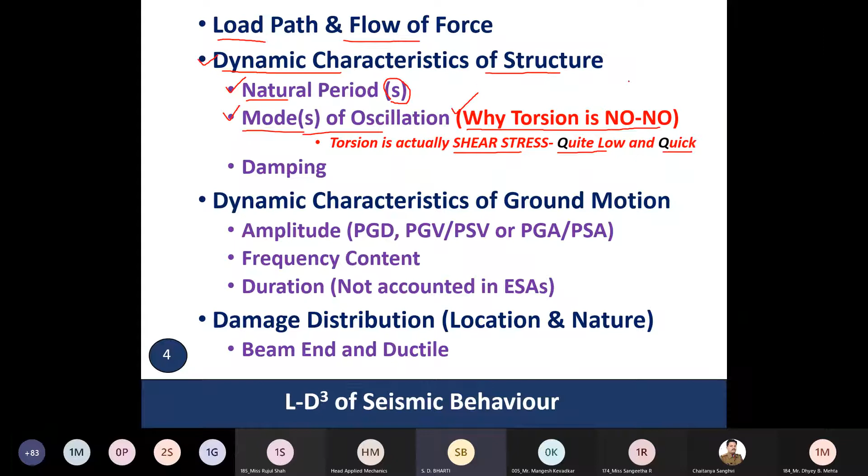The third dynamic characteristic is damping. We typically assume 5% in Indian standard and other standards. This is the material property. Previously, in the earlier standard, there used to be 2% and 5% - 2% for steel and 5% for concrete. Now we have 5% for both. So these are the dynamic characteristics - this is the D of LD.

Another D you can see is LD3 here - the dynamic characteristic of ground motion, which is represented by three parameters: amplitude, which can be peak ground displacement, peak ground velocity or pseudo velocity, peak ground acceleration or pseudo acceleration; the next one is frequency content; and the third one is duration.

Here I want to underline the duration effect - the analysis process that we are doing using the static methods is not accounting for the duration effect.

The next D of LD is damage distribution. As you have been listening from other speakers, under the design earthquake, a building is bound to undergo in the inelastic range - it cannot remain in the elastic range under the design load. So there is bound to be some damage. Damage, inelasticity, non-linearity - these three words are interchangeably used, but you have to understand: damage is the manifestation of inelasticity, and non-linearity is the cause-effect relationship of force deformation when a building gets into the inelastic range. So non-linear behavior, non-linear analysis, inelastic behavior, and damage - these are three terms interchangeably used, but the focus of each is different.

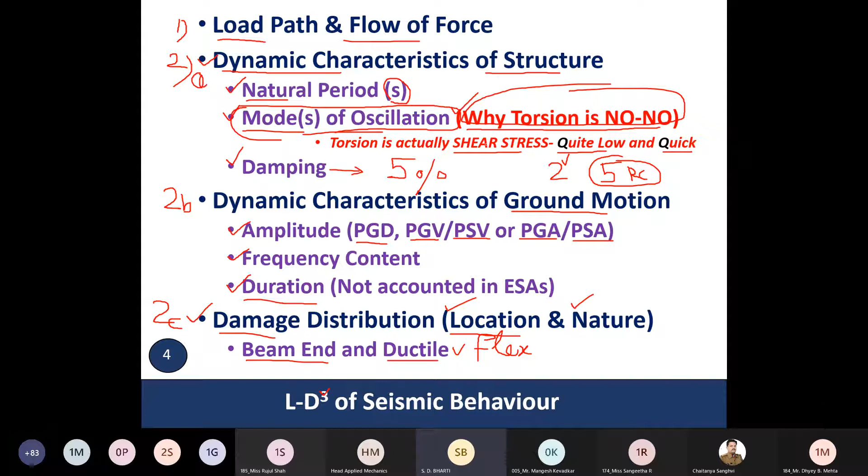Next, in the previous slide we saw modes of oscillation is the biggest problem for us. If you are able to control the modes of oscillation and make sure that torsion and other quick or brittle modes are avoided, then half of your job is done. Now let's understand how modes of oscillation are controlled.

The biggest, simplest, and most dominant thing to control modes of oscillation is configuration. IS 1893 describes configuration by way of saying this is not, this is not, this is not - meaning if this is, then it's irregularity. So configuration is actually defined negatively by way of defining irregularity. Irregularities are essentially of two kinds: plan irregularity and elevation irregularity. Plan irregularity can be a re-entrant corner or a non-parallel lateral system - please understand this is in plan, and this is an elevation.

So if you have a non-parallel system, there are things in both plan and elevation that are quite similar. Re-entrant corner in plan and re-entrant corner in the vertical also.

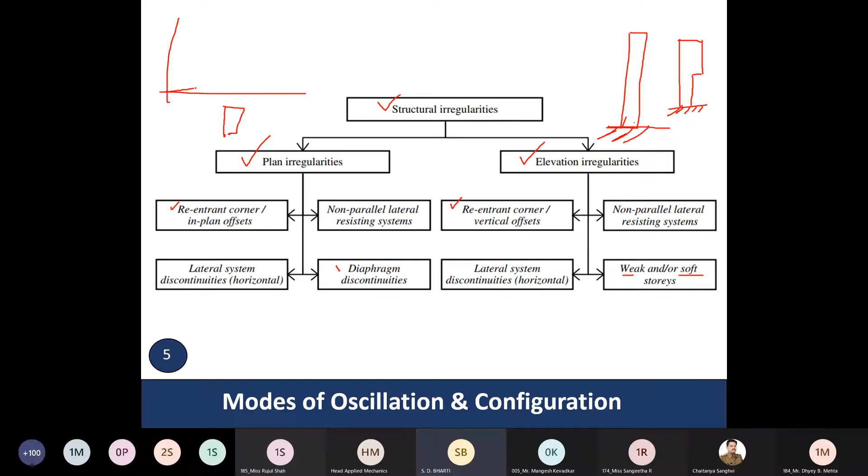Weak means it doesn't have the sufficient strength. Soft means it doesn't have the sufficient stiffness. Let's understand. See, this is your soft. And this is your weak. Both of them having same strength practically.

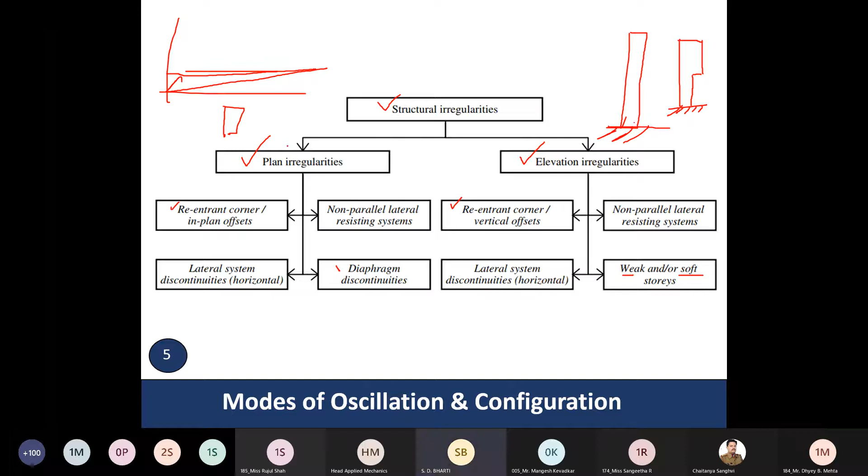Let's understand attributes of a good configuration - what your configuration should have in order to have desirable modes of oscillation. It should have low width to depth ratio, so there is no torsional effect. It should have low height to base ratio - we call them slenderness ratio and aspect ratio. So there is no overturning moment.

Similar story heights - dissimilar story heights will create stiffness irregularity if you are to use 1893 language. Short span, low unit stress, and symmetrical plan again will have a good deformation behavior. Uniform, again it's a stiffness issue. So these are the things, they have been worded differently.

If you missed one, what is the consequence of redundancy? Means alternate load path. In earthquake, since we are allowing damage, you always want redundancy. Please understand, redundancy may be a problem for your analysis. But for structure under earthquake, redundancy means if one member yields or gives way or gets into plastic deformation, there is an alternate load path.

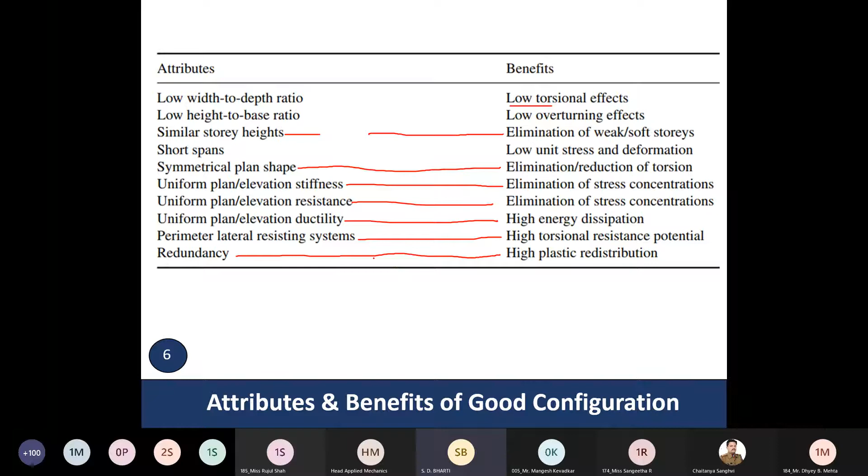So see, earthquake design is about matching capacity with demand. This is terminology which most undergraduate classes don't learn. But in graduate classes and doctoral programs, or in the typical literature of earthquake engineering, you will find capacity and demand. Originally these are terms which have actually come from economics and management. But civil engineering or structural engineering, particularly in the West, is quite influenced by economics. So that is why these terms are used.

So let's understand what are the demands and capacity in terms of earthquake engineering, and these are the two things where the word demand is used. Loading imposed is also known as the action part, which is also called earthquake demand, which leads to force loading as well as displacement. Please understand, I am not saying that in the linear elastic range, force and displacement are not okay.

But in earthquake analysis case, it's a displacement loading which is critical, which is the load actually. What you are doing in earthquake is that you are shaking the ground, you are trying to displace the ground. And because you are trying to displace the ground, there is a mass sitting on top of it. The mass will experience inertia force, inertia effect, and then inertia effect will generate inertia forces which will be getting transferred from top to bottom. So that is why - what is causing it is displacement.

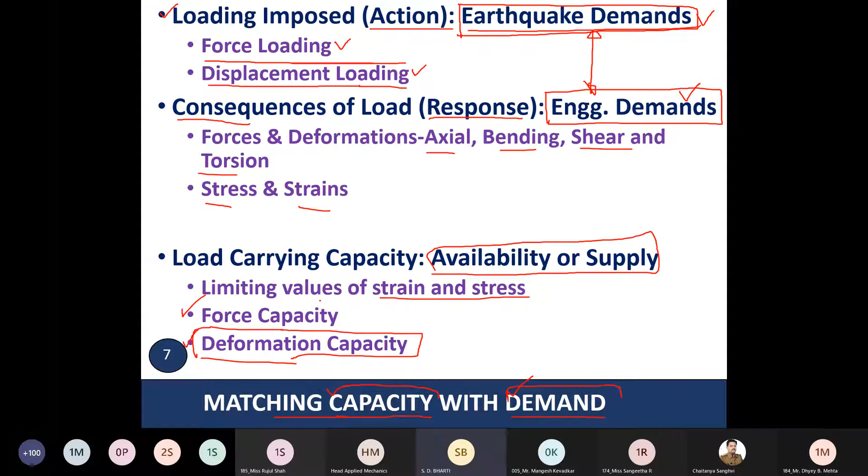Let's move on, this is a very good chart. We are talking about seismic demand, design philosophy, performance objective, and the limiting engineering parameter. The first one is the seismic demand or hazard level. The earthquake has to be defined in terms of its probability of happening. We are assuming Poisson's distribution, and design life is 50 years, which is generally the design life for most buildings or regular structures.

So if you have a service level earthquake, which is a minor earthquake that happens frequently, it will have 50% probability of happening in 50 years of design life. Using Poisson's distribution, this gives a return period of 72 years.

What is the design philosophy for the service level earthquake? You want no structural damage, or some say minor non-structural damage. Nowadays the design objective is defined both in terms of structural damage and non-structural damage, so you can say no structural damage, or no non-structural damage also.

And what is the performance objective? Performance-based design or performance evaluation has become a buzzword now. You will learn more about that when Professor Murthy talks tomorrow. What you want is continued operation or immediate occupancy. These two terms are used interchangeably. Continued operation means you don't have to leave your building premises and you continue to operate. Immediate occupancy is slightly more, because it just begins to touch the yield.

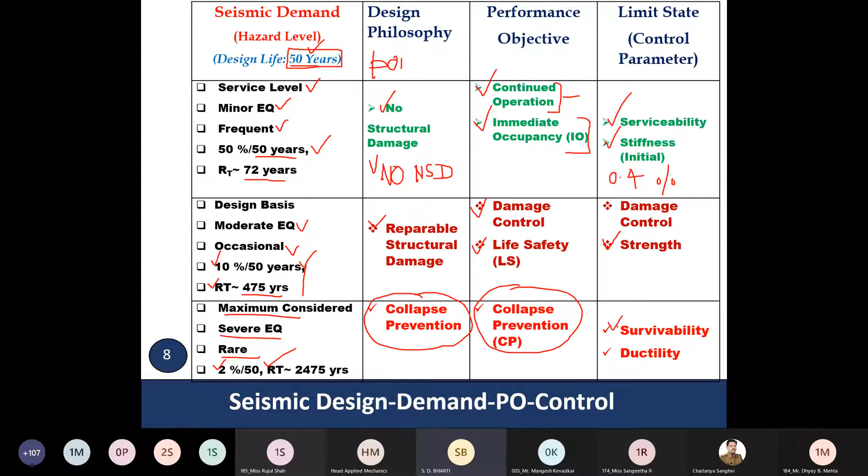These performance objectives, we have been doing. Now the new term is collapse prevention performance objective. Your limit state is survivability and ductility. These are the things which will help you there.

So the next thing is that, just a minute. Yeah, there is something. Just remove this, this is not there. This is from the next slide.

So now what are the methods of investigating seismic behavior? If your interest is only up to elastic behavior, you don't want to get into the inelastic range - this is our code as of now, which tells you to investigate up to elastic behavior, follow certain prescriptions, and assume that in case of a severe earthquake, your structure will follow a well-defined ductile deformation path. But your actual investigation is limited to only the linear elastic limit.

So there are two methods: linear static methods, where the input is taken from design spectra or response spectra, or any kind of spectra - there are a variety of spectra - and both methods are actually static methods. The equivalent static method, or equivalent static single mode method, our code calls it ESM. The other one is also equivalent static, but uses multi-mode, which is called the response spectrum method. The code calls it RSM.

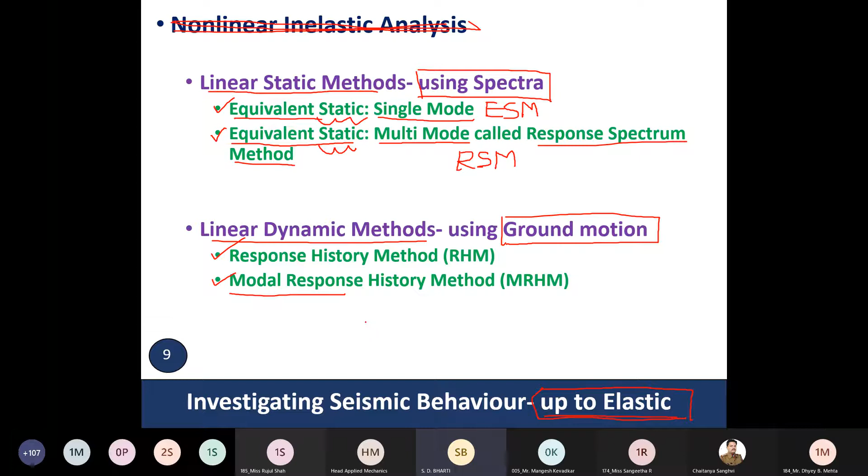The input required for this is the ground motion history. There are two ways of doing it: one is the response history method, the other is the modal response history method. Please understand modal response history or modal response spectrum method, both are kinds of superposition. One is in the frequency domain, where each mode is calculated separately and then put together. The first one is the time stepping integration scheme.

Next we move on to the nonlinear method. In the nonlinear method, there are also two methods. All nonlinear methods are basically based on pushover. Pushover methods essentially depend on two things. One is the distribution of the lateral load or lateral push.

Your objective in applying lateral load is that you want to imitate the inertia effect. You may have a lateral load which is distributed like this, or you may have a lateral load which is uniformly distributed, depending upon how your superstructure is behaving.

Depending upon that, the nonlinear static method, or what is popularly known as pushover based methods, are of two kinds: conventional pushover and adaptive pushover. In conventional pushover based methods, once you decide the pattern of push based on initial stiffness, initial mass, or initial damping on the fundamental mode, you fix the push pattern and continue with that till the time your desired point or point of interest is reached.

In adaptive pushover, every push you update the K and M, and once the K is changed, you keep changing the push pattern. So this is how nonlinear static methods are of two kinds: conventional push and adaptive push. In adaptive push, you keep on updating your model, meaning the computer keeps updating the model.

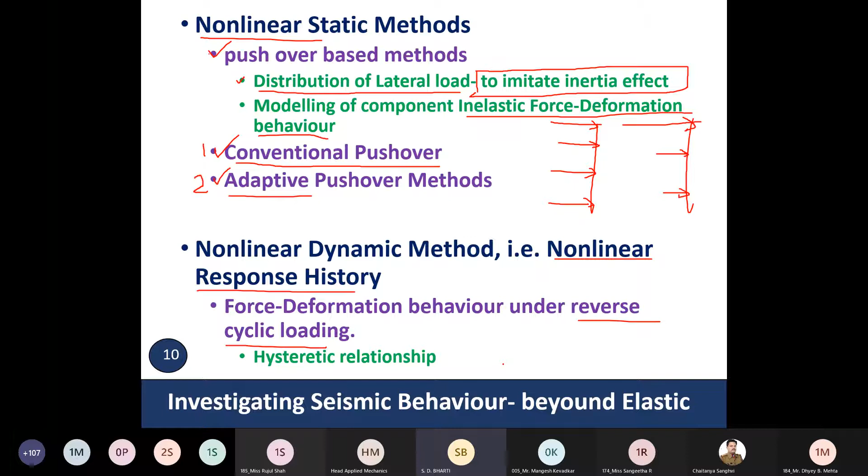The second one is the nonlinear dynamic method, also known as nonlinear response history method. In this also you require force deformation behavior under reverse cyclic loading. You require the complete hysteretic behavior or cyclic behavior of the component. So these are the methods of analysis.

So these are some of the component force deformation behaviors. We always love this one because it dissipates maximum energy. It goes like this, and when it comes back, it takes full shape with no deterioration. Whereas in this case, once it comes back, during the returning phase, there is a degradation in the stiffness.

Every successive cycle, the first one is the outer one, and every successive cycle it comes back in. So in every successive cycle, the energy dissipated is reduced and the stiffness is declining. Pinched behavior is typically when you have some slip or some kind of mechanism where every time there is a slip.

So this is the pinch hysteresis loop. There is cyclic degradation - every cycle there is a degradation in stiffness and strength. These are some of the idealized typical hysteretic behaviors that you would need to plug in when you do your actual nonlinear response history analysis, or full dynamic analysis under nonlinear conditions.

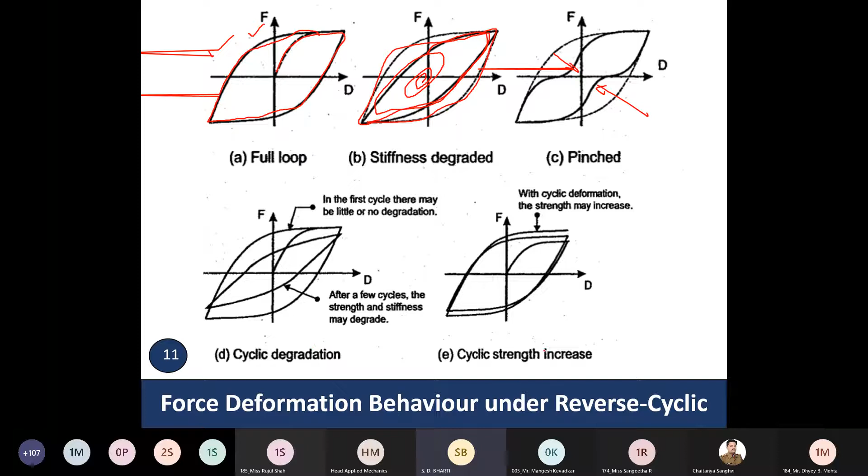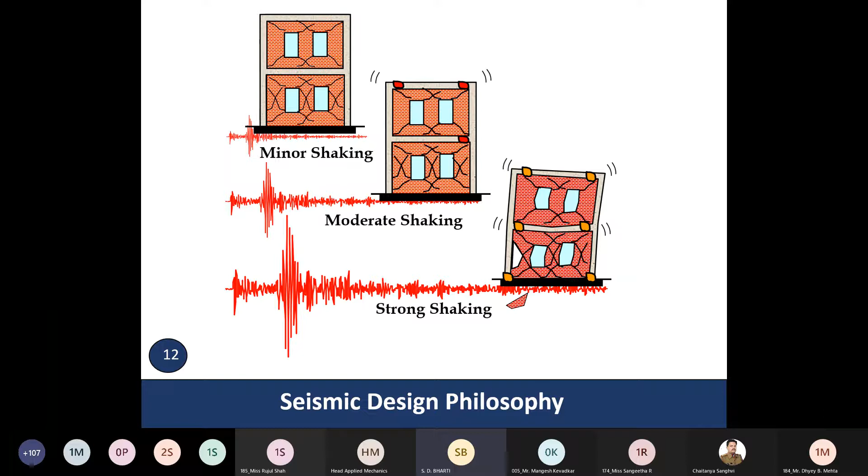This is the philosophy as we had discussed in the table. In minor shaking, there should be only minor non-structural damage, but no structural damage. In moderate shaking, you have some damage in the structure, and in strong shaking, you have significant structural damage, but no collapse. This is the design philosophy we have been familiar with.

These are the seven attributes. The first one is configuration. If your configuration is good, there is no stiffness and mass irregularity, both in plan and elevation. Your structure's modes of oscillation will be perfect, there will be no stress concentration. Even though there is damage, the damage will be well distributed and there will be no quick, brittle, or sudden collapse or failure.

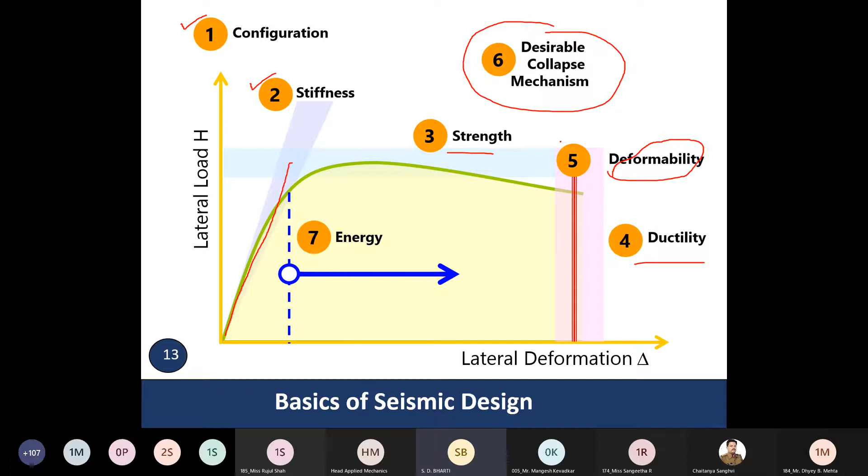The second attribute is stiffness, which governs serviceability. Initial stiffness should be good enough so that under minor shaking conditions, the non-structural elements are secured. The third is strength. The fourth is displacement ductility or system ductility. Fifth is the total deformation capacity as a system so that energy dissipation is maximum, and all this helps you choose a desirable collapse mechanism. You are all familiar with these seven attributes of seismic design.

Based on these, there are four methods of seismic design. One is stiffness based, another is strength based. These two are currently in use. Deformation based design is also in practice, and as you know, it essentially relies on nonlinear analysis. Our energy based design is still in the developmental stage, which will combine both force and deformation together in the nonlinear range. This is very difficult because what you require in energy based design is the nonlinear component force-deformation behavior.

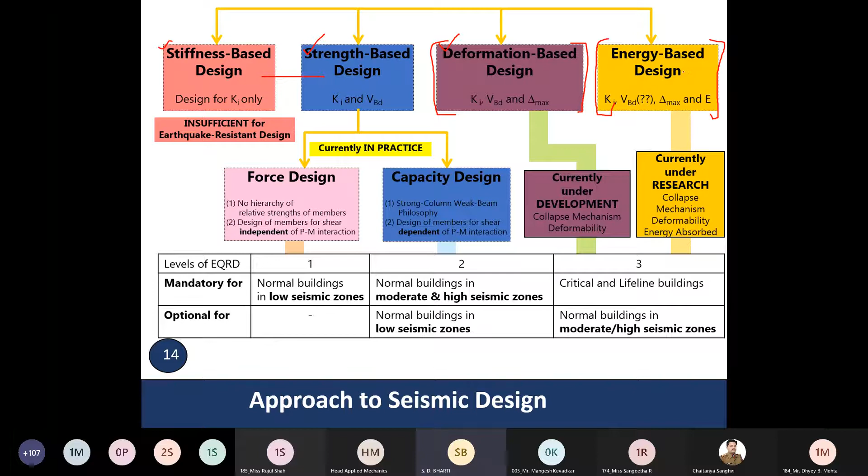Okay, so with that, the background part is over. Now let's move on to supplemental energy dissipation devices.

What do supplemental energy dissipation devices do? Just wait a minute. What you can see in the background is the newly set up National Earthquake Test Facility at MNIT Jaipur. We'll talk about that in subsequent slides if time permits.

Why do you want a supplemental energy dissipation device? The basic purpose is performance enhancement. How do you enhance performance? As you have seen, the structure undergoes damage. Why does it undergo damage? Because the earthquake pumps in energy, and that energy has to be dissipated without much damage. So if you can create a mechanism by which energy can be dissipated by some desirable structural component or element that can dissipate energy without endangering your main structural system, that is performance enhancement - no structural damage, no non-structural damage.

So the purpose of a supplemental energy dissipation device is energy dissipation, which is actually called damping. Literally, damping means lowering of the response amplitude. But why does that happen? It happens because energy is being sucked in. And when you install an energy dissipation device, it will also increase stiffness and strength, or it may typically.

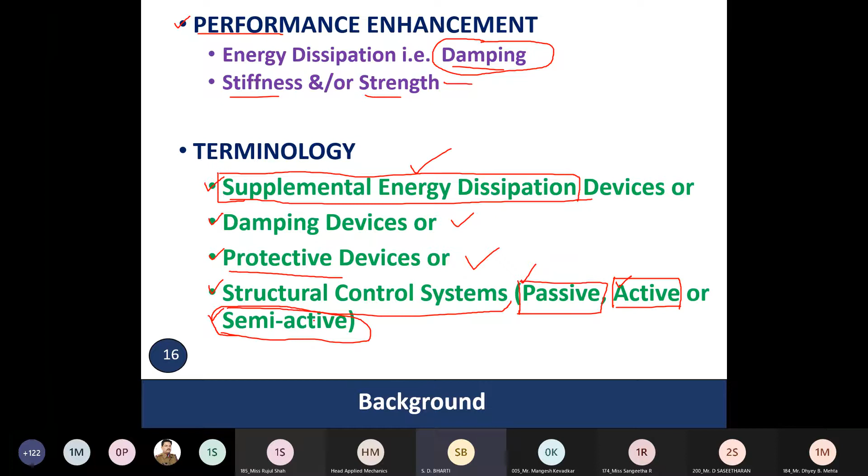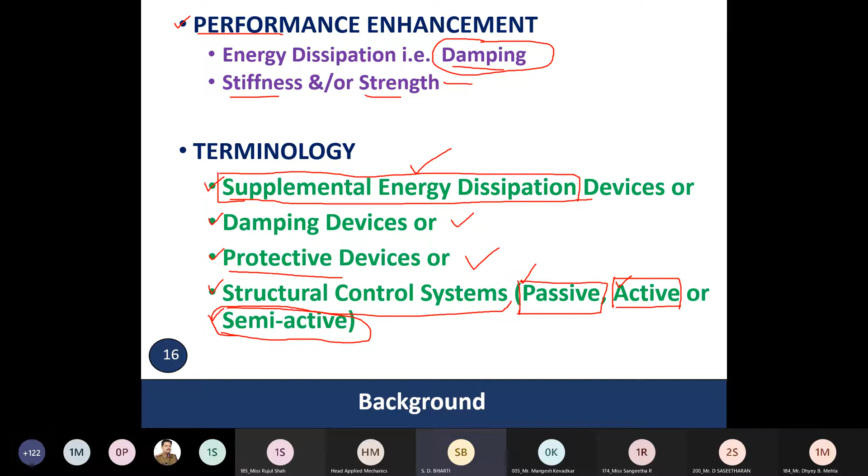Passive and semi-active are more common. Semi-active is an extension of passive. In a passive device there is stiffness, there is damping, and there are all the arrangements. So if by some way you can change the damping or stiffness of a passive device, it becomes semi-active - some people call it controllable passive also. So this is the terminology of supplemental energy dissipation. This is all about it.

Supplementary energy dissipation devices are essentially of two kinds. Let's understand supplemental energy dissipation devices - I'll be using this term consistently, not damping device, not control system, not protective system, because this term says it all. So supplemental energy dissipation devices are actually structural elements. Please understand that, let's demystify this. They are no magic wands, they are just structural elements.

What is special about this structural element? It is factory made, designed such that the force deformation behavior of it is known to the best possible extent. They are factory made products, to be fixed appropriately to some structural location such that they perform the desired function. They are just like any other structural element, but with the difference that you know the force deformation behavior. In the nonlinear range, since they have a big fat force deformation loop, they are able to dissipate substantial part of energy.

All structural elements undergo deformation because of relative motion, and so dissipate energy. So because of the relative motion of each end of the device, they dissipate energy. They dissipate energy because they are inherently inelastic in nature, and under cyclic loading, they do not follow the same path. That is why they dissipate energy, as we have seen in various hysteresis loops.

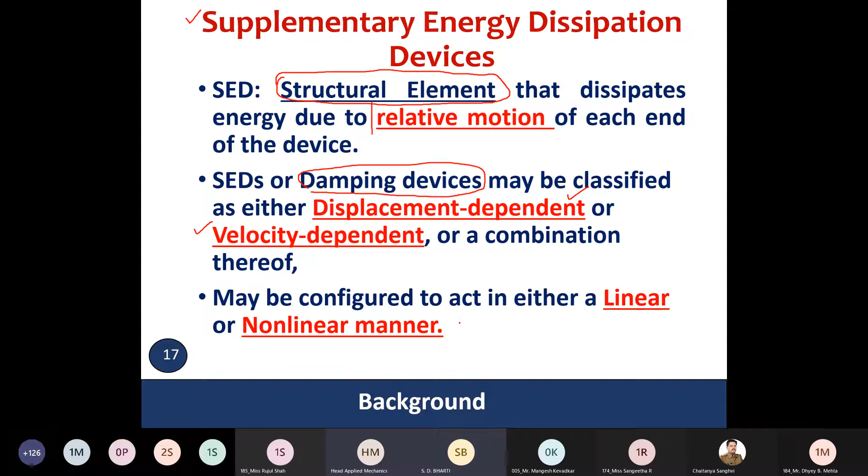All these devices - as I told you, supplemental energy dissipation devices are essentially structural elements - are factory made, configured, designed, controlled in such a manner that their force deformation behavior is known to you well in advance in the entire range of nonlinear, cyclic, reverse cyclic loading. So their behavior can be nonlinear or linear, depending upon the device and situation.

The force response primarily is a function of relative displacement. When you have a displacement dependent device, their force is relative displacement dependent and substantially - please understand, substantially - independent of relative velocity. They are called rate independent, and they exhibit hysteresis. Hysteresis means energy dissipation. The exact meaning of hysteresis is that the value of force at a particular time is not only dependent on the displacement at that time, but also depends on the history of loading.

That is what we call hysteresis. The inelastic behavior in most metals will exhibit hysteresis - meaning what has gone into the past will have a bearing on the present. So hysteresis can be rigid plastic, which is the case in most friction devices. It can be bilinear, it can be trilinear. So displacement dependent devices are rate independent - their behavior, the force at a relevant time, will mainly depend on the displacement value at that particular time. You can call them rate independent. Most metallic yield dampers or friction devices are rate independent.

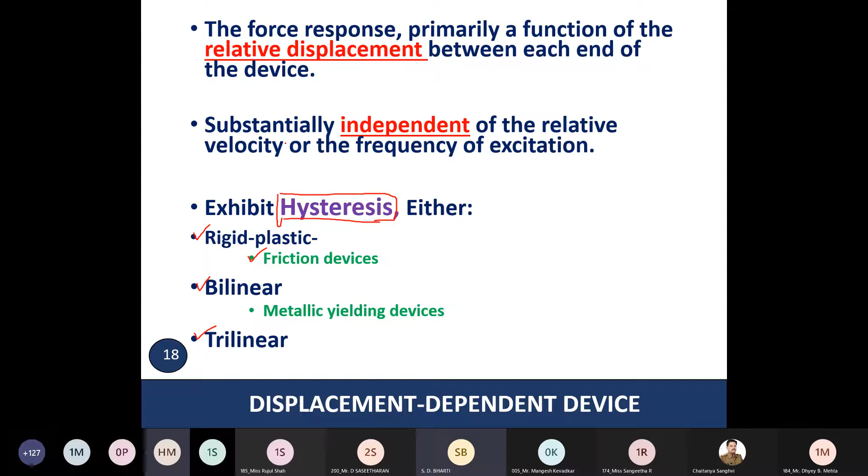They are hysteretic, meaning the force value at a particular point is a function of the displacement value at that time, not the rate at which displacement is changing in the next instant, but it still depends on what has happened in the past. Most human memory is actually hysteretic too - our behavior at a particular time is influenced by what happened an instant before, or even a month before.

Now the next category is rate dependent devices. Displacement dependent devices are friction devices or metallic yield devices. The velocity dependent or rate dependent devices are of three kinds, essentially solid visco. Whenever you say visco, it means it is dependent on velocity - dependent on rate of loading, dependent on rate of displacement.

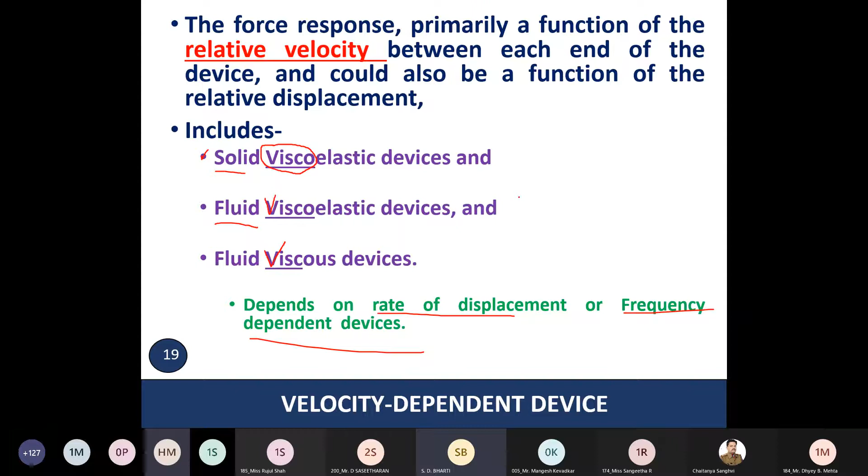This V in visco and velocity dependent - you can always remember it. So it can be solid viscoelastic, fluid viscoelastic, or fluid viscous. Since they depend on rate of displacement, you can call them frequency dependent. It means the same whether you call it velocity dependent, rate dependent, or frequency dependent - just three words for the same thing. Whenever you say visco, it means there is some fluidity in the material undergoing deformation, which is affected not only by displacement but by the rate of displacement, determining how the next increment happens.

So these are the categories of devices: metallic yield dampers. As you know by now, two of these are displacement dependent devices, and two are velocity dependent devices. You can call them displacement dependent or velocity dependent, rate independent or rate dependent, frequency independent or frequency dependent.

Same thing. Then the last category is dynamic vibration absorbers. In terms of function, they are quite different from these two categories - I'll tell you how. The broader category is dynamic vibration absorber, with two kinds: tuned mass damper and tuned liquid damper. The biggest difference - let me call the first category A and this category B.

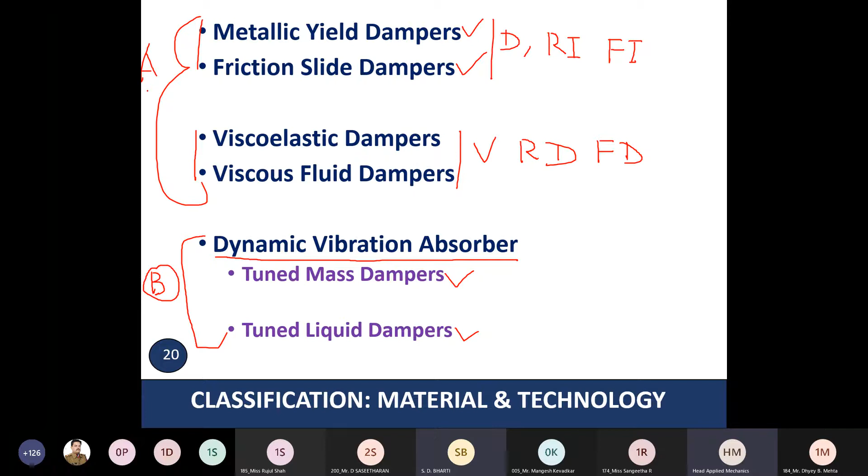Category A is where you place these supplemental energy dissipation devices in the load path from where the inertia force is generated, typically in the bracings. It will be placed like this. But dynamic vibration absorbers are not placed in the load path - they are typically placed at the top of the structure. We'll discuss them when we move on.

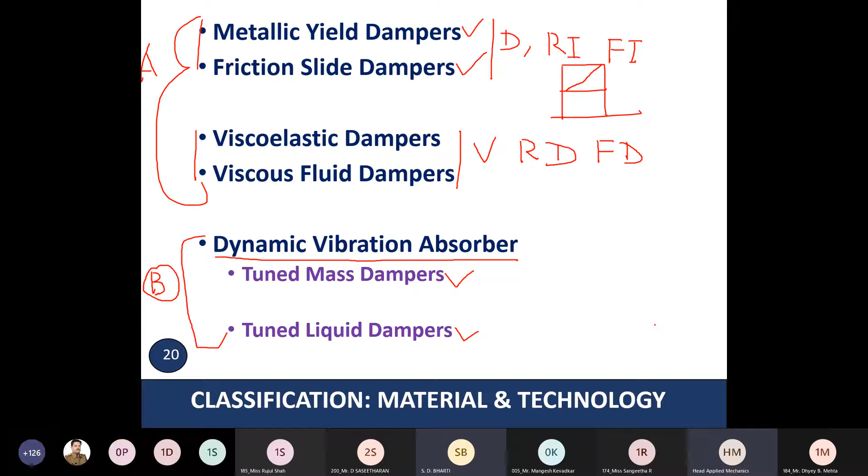Now let's understand energy - our input energy. Earthquakes pump energy into the structure. From this slide onwards, we are actually talking about earthquake as an energy input mechanism. Part of this energy is recoverable, part is irrecoverable. The recoverable part is elastic strain energy or potential energy and kinetic energy. If there is no irrecoverable energy, there will be an exchange of energy between these two.

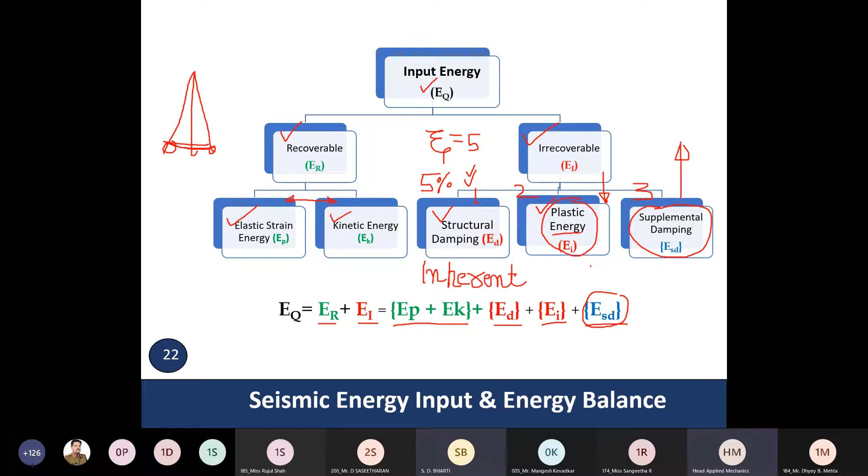Now let's understand this. This is the acceleration, and the energy is pumped into the structure. This is the kinetic energy and strain energy. This is the inherent damping, this is the damage. And if you want no damage, you have to address this, since structural damping is anyway there. And if the energy is so much that you don't want this damage part, you have to increase that completely.

This is another graphical presentation of energy balance. Why do you require supplemental energy dissipation devices? Let's move on.

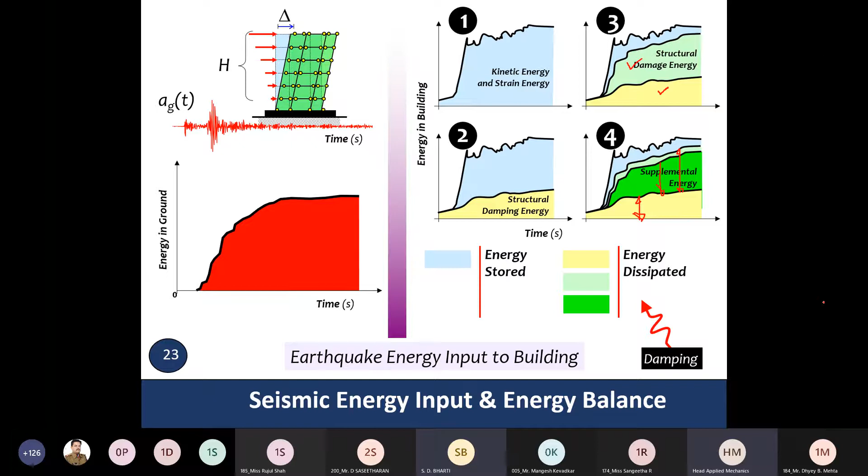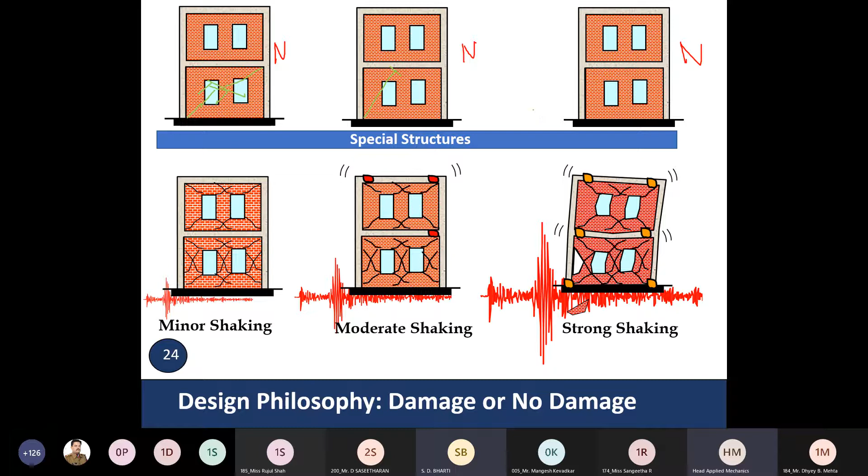Minor shaking causes some cracks, moderate shaking causes some non-structural as well as structural damage, and so on. And if you don't want any cracks or damage at all, then you have to put some devices here, let's say where windows are not present, you put some damping devices there. So this is what performance enhancement using supplemental energy dissipation devices means.

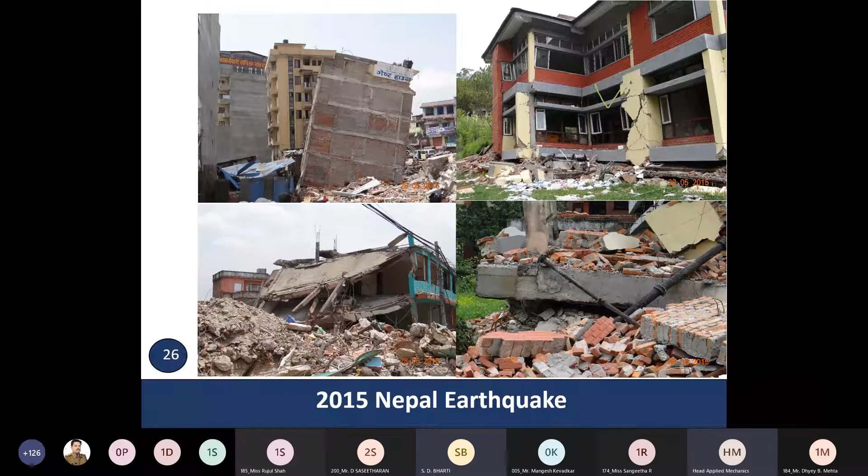Now the question is, how do supplemental energy dissipation devices influence structural behavior? Let's understand that by way of some fundamental structural dynamics.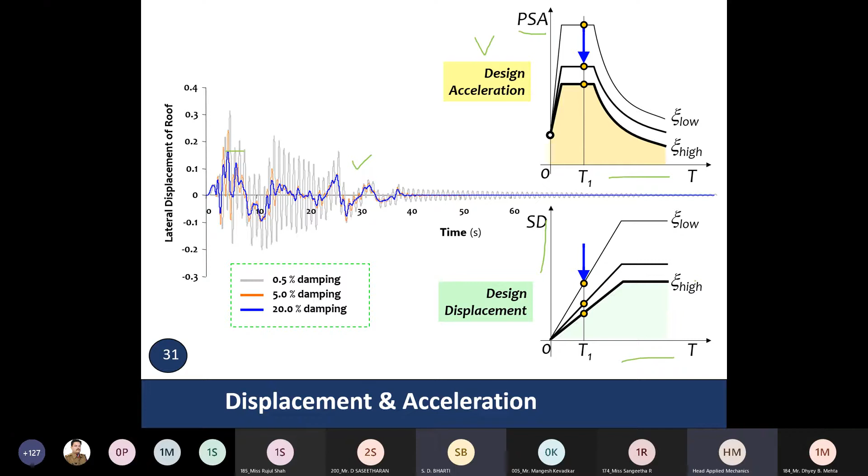Now let's understand this - this is the viscous damper, this is the viscoelastic damper, this is the hysteretic damper, this is the friction damper, and this is how you have to place them. What is happening because of this? The inertia force will have damping, it will have some stiffness, therefore the response is being controlled. You can say these are special structural elements which will add damping and which will add some stiffness.

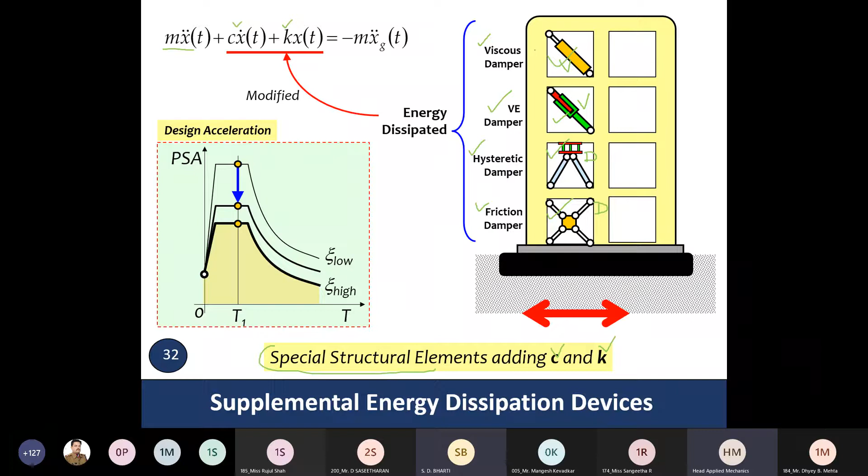So the third category - the first two categories we have already seen: the viscous damper, viscoelastic damper, and hysteretic damper. These two are velocity dependent, and this one is displacement dependent, as you can see. This is not to say that in the same structure you will place all of them; this is just to show how they are placed. We'll discuss the placement of dampers in subsequent slides.

And this is your dynamic vibration absorber. Please understand that dynamic vibration absorbers are typically placed on top of the building, and the mass is about 2 to 3% of the main structure's mass. This is your main structure, and this is your supplemental or dynamic mass. It will have some K, and this will also have some K.

The ratio of M and K are so chosen that both of them have the same natural period, particularly in the fundamental mode. So when the structure shakes, both will have the same natural period. Being more flexible, this will oscillate more, so it will take away energy from the main structure. This is the principle of the dynamic vibration absorber - they are appendages to the building, adding M, C and K.

Whereas those were special structural elements, they were not appendages like this - they are put into braces or other places where they take part in the flow of forces, where they actually take away the input energy by being tuned.

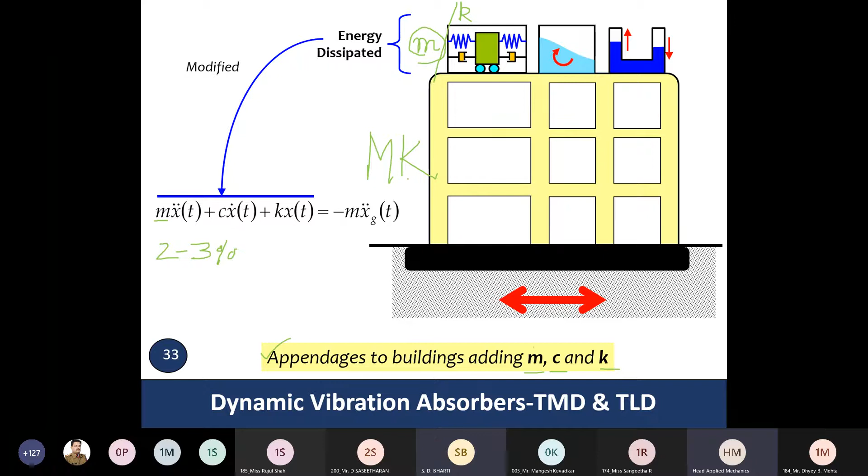So one of the devices which one of our successor resource persons will be talking about is base isolation. I have deliberately skipped base isolation here. Base isolation is another protective system, but it works on a slightly different principle - the seismic base isolation is placed at the base of the structure.

And what does it do? It filters the high frequency ground motion. Being a flexible system, it's able to stop high frequency ground motion from getting transferred into the main structure, but it will also have some damping. So it's essentially not exactly a supplemental energy dissipation device, but a base isolation device which isolates the base, stopping high frequency ground motion from entering the structure from the base, while still having some damping.

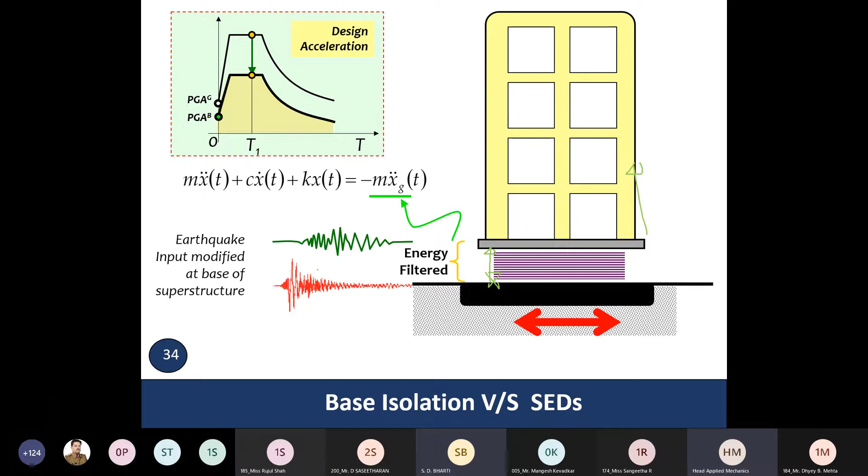That is why it is sometimes put into the category of passive control devices, but there is a difference. When your building is in the acceleration-sensitive region, or your superstructure is quite stiff, only then will base isolation work. Whereas for supplemental energy dissipation, your structure should be in a different range - there has to be some relative displacement between floors for supplemental or passive energy dissipation devices to dissipate energy.

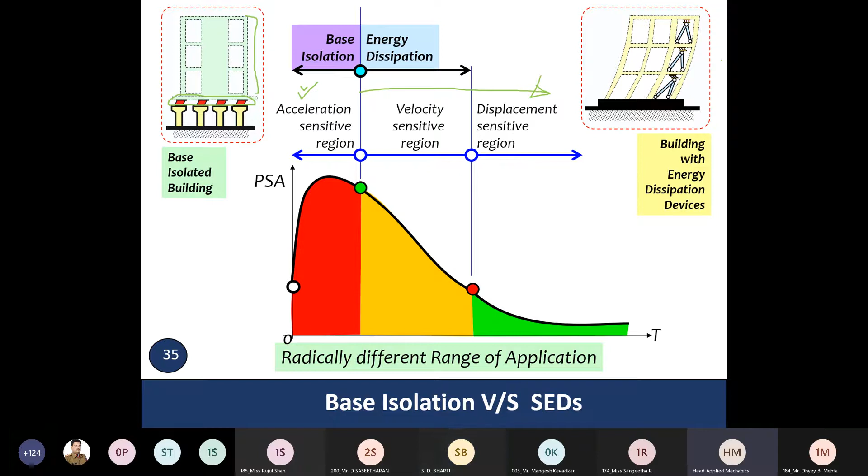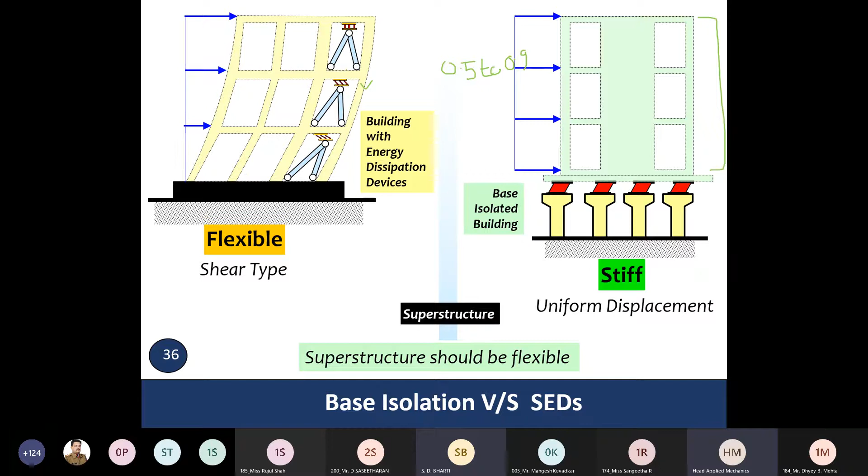Typically, supplemental energy dissipation devices or dynamic vibration absorbers are good candidates for tall structures where wind-induced vibrations are likely. So for flexible shear-type structures, dampers are the better candidate, whereas when your superstructure is very stiff, in a period range of about 0.5 to 0.9 seconds, and can move rigidly like a single mass, base isolation works well. Whereas for very flexible shear-type structures, flexible supplemental energy dissipation serves the purpose better.

Now let's move on to modeling and analysis of supplemental energy dissipation devices.

So it will have some difficulty in the sense there is no restoring back. So typically when you have a viscous damping device, restoration is an issue because they do not come back on their own. I mean, if the ground motion reverses, then it's a different thing. But at the end of the cycle, they don't come back.

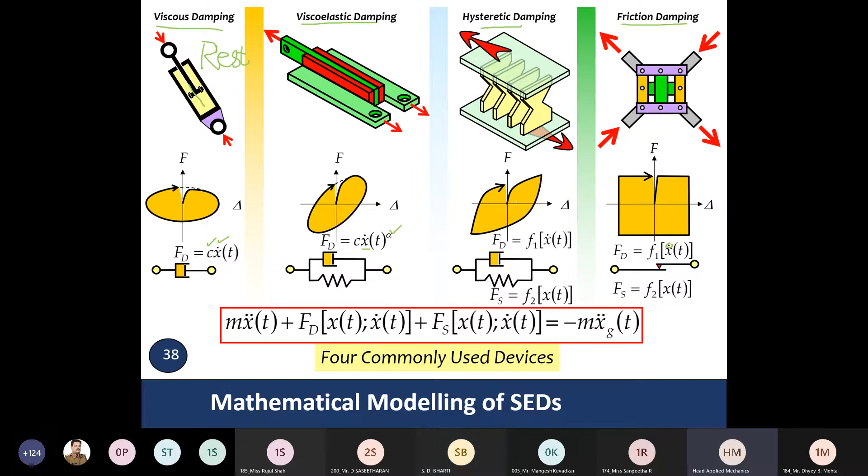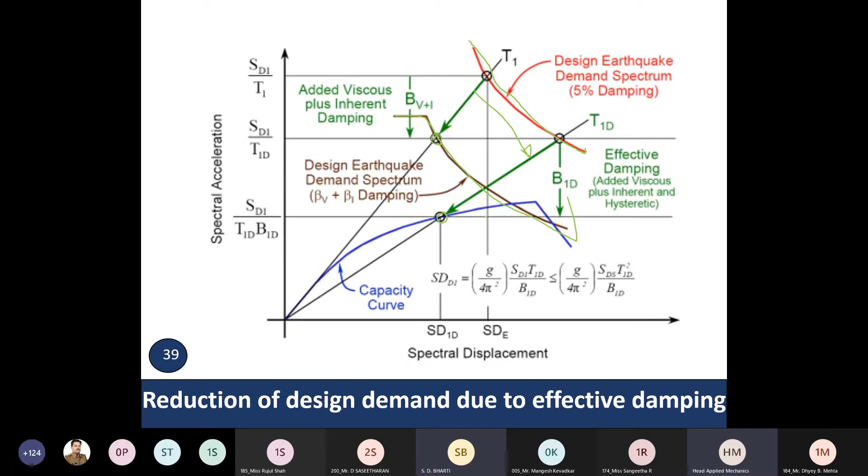Damping will have reduction in demand. It will have reduction in the period of the structure. So therefore your performance point is coming down.

There are methods of analysis. There are equivalent static methods given in ASCE 7, ASCE 41 and FEMA also. But what is required in design of systems with supplemental energy dissipation devices is that all such devices are to be prototype tested, and you should be able to know what is the effective damping and what is the effective stiffness of it.

If you know these through prototype testing based on standard loading protocols, then only can you use that equivalent static method. Or else there are a good number of mathematical models of supplemental energy dissipation devices which give the force, which is a function of force, displacement as well as velocity, can be linear, can be non-linear. You put them into the response history analysis equation and you can do the time stepping integration.

And one thing you must understand is that most of the supplemental energy dissipation devices are factory made, custom made, patented devices. So the device manufacturers, there are many, they will give you the force deformation behavior of this thing. Or some of the devices which have become very popular, the literature will also give you the force deformation behavior, which will be used for the analysis model.

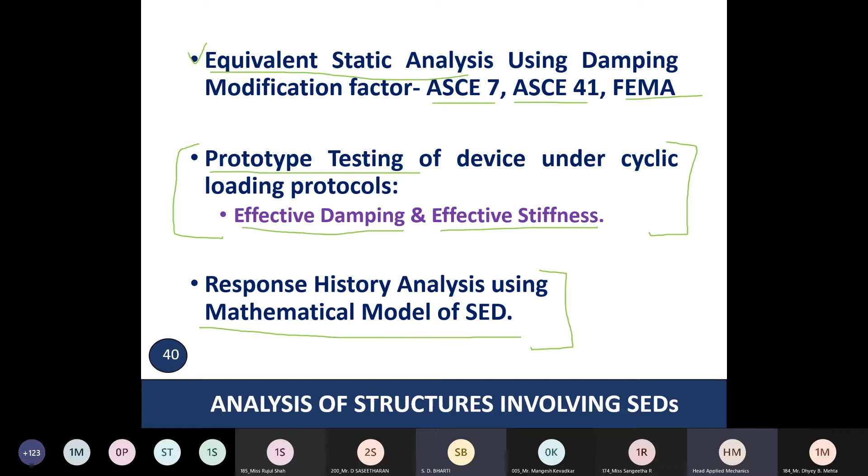In one of the lectures, I noticed somebody asked, how do you put supplemental energy dissipation devices? The answer to this is very simple. See, at the end of the day, there are structural elements. They are special because their energy dissipation is substantial. They are special because their force deformation is very well known to you. They are special because they are manufactured under controlled conditions. But at the end of the day, they are structural devices. They will add some stiffness, they will add some damping.

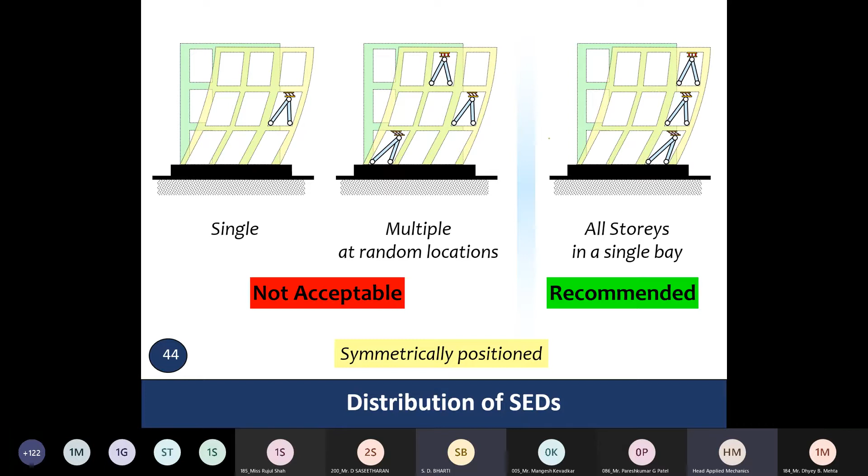And the supplemental energy dissipation devices will not so much be a mass problem. So wherever you put them, they are going to create a structural irregularity also. Therefore, you just can't put them randomly and you cannot create structural irregularity. So you need to have some specific understanding of the behavior of the structure, and based on that, by and large, you have to place them symmetrically so that you do not create any structural irregularity. That is the fundamental rule.

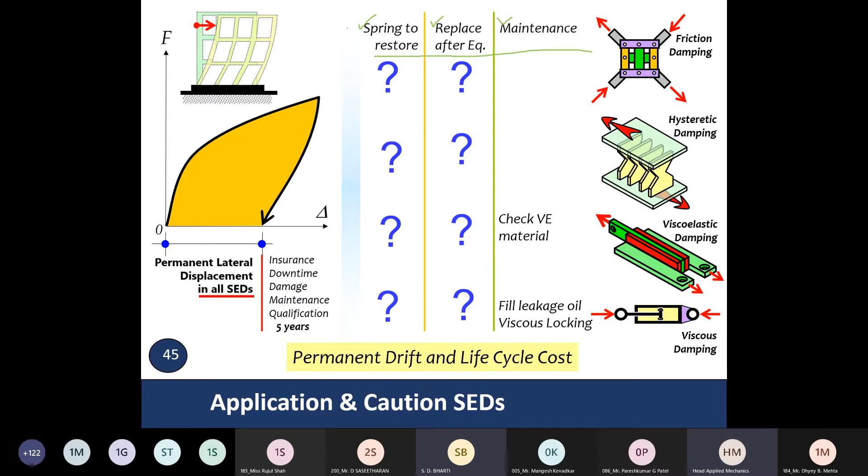Another thing that you must understand is that springs need to restore, you have to replace after earthquake, and maintenance. These are the three things you must always understand while choosing a supplemental energy dissipation device.

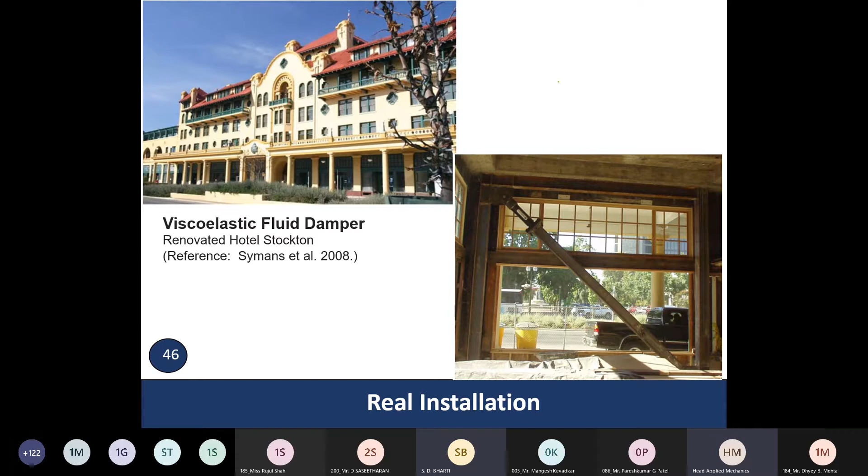There are some pictures which will show you where the supplemental energy dissipation device have been used recently. This is how it looked like. These pictures have been taken from a paper from Symans et al, which is available to researchers when they search on Google and all. This is the viscoelastic damper.

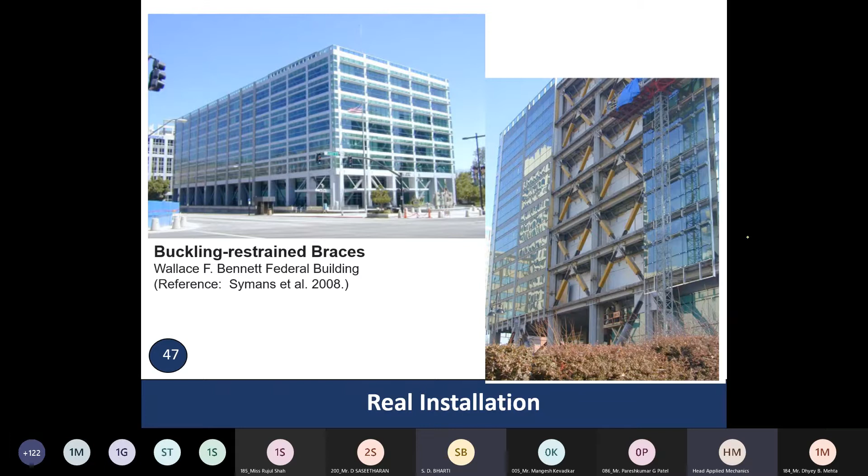These are the buckling-restrained braces, which is again a metallic yield device. Buckling restraint braces are special devices, but metallic yield devices only. They have been developed by Nippon Steel Corporation in Japan, and there are umpteen number of papers and books on buckling restraint braces. I did not deal with them specifically because they are a special category of devices, but in terms of classification, they are metal yielding devices. Then there are friction devices. They have been used, and that is all I wanted to share with you.